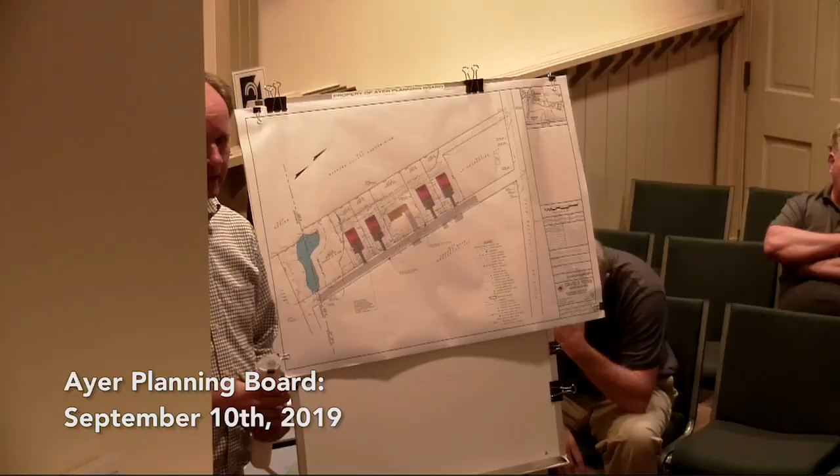So we made those adjustments, revised our drainage calculations, and in the 2 and 10-year storms, the amount of water going there was reduced even more, but the 100-year went up just a little bit. We're still sending less water to that design point from pre-construction by upwards of 20 to 25%.

So all the other driveways, the houses, all that stayed the same. The adjustments were basically what to do with the grass swale, which we removed. We piped it underground, and we've agreed to replace that existing catch basin and connect to the existing pipe that's already there. We met with them, they agreed to those things, and we got them the revised plans, and they were able to look at it before tonight, which was great.

Anything else in the letter, the original letter from the DPW? Did you talk about that bonding performance bond? We did talk a little bit about it, and our applicant is certainly agreeable.

Anytime you do work in a town way, that's automatic, that's understood. But on the private property side of things, it gets a little bit muddier legally. So I think setting up a bond when it comes time to apply for the road opening permit would be expected, and that's understood by the applicant.

That's usually when we get ready to have conditions of approval for a project, I usually consult with DPW and get the language set and the amount set. And that's why I was hoping Mr. Wetzel would be here this evening, because I don't have that information right now, and I'm not prepared to suggest a condition of approval related to the surety for this.

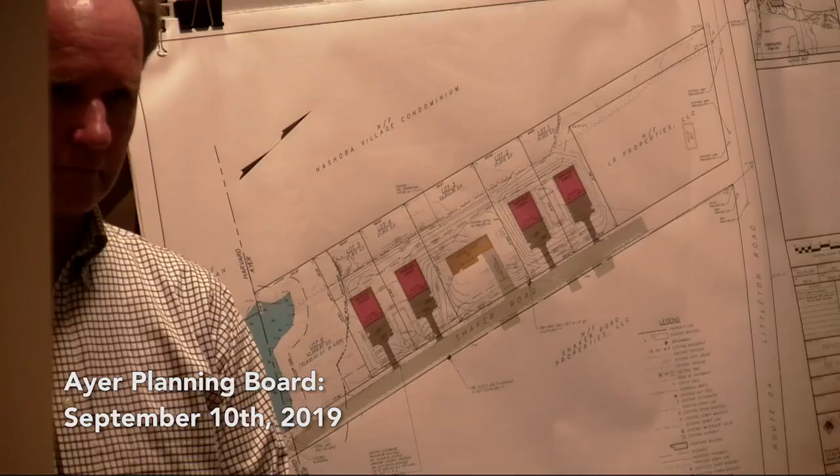The conditions that we would put on this would be the conditions they were allowed to put on because of the NPDES, for the town bylaw, stormwater related, or related to the guarantee of the performance of those drawings. So we're not approving a general site plan, we're approving a site plan for the stormwater drainage cycle.

Because they're A&R lots. I understand, yeah. But the other runoff on the site that's not being addressed by the new piping and whatnot, that's just going to be overground.

Well, we evaluated the whole site, pre-construction and post-construction. We had 3 different design points, not shown on that particular plan, it was shown with the drainage cover. There's one design point that goes up to Route 2A, up that little neck. Another one that goes to the catch basin, and a third one that ends up in the wetland, the low point down at the corner of the property.

Again, pre and post, we evaluated all those watersheds to make sure we were improving. Design point one was exactly the same because we're not doing anything other than putting the sewer line through there. Design point two was the biggest factor because all the impervious is going in that direction. The third design point was to the rear of the property because we're building up the land for the sewer line, so there's a berm back there blocking the water from going towards the roads, instead directing it towards the wetland. We have a level spreader right outside the 100-foot buffer zone behind lot number 5.

That's to kind of slow that pace down. And again, all the calculations were given to DPW to review, and they were happy with it.

So if the board agrees, we'll table this until Mr. Wetzel gets there. He's expected to come this evening, that's great. At some point we should be willing to make a motion to move this along. You've got a full agenda. Any comments from the audience? I'm not sure if anyone has any comments on that. No? Okay.

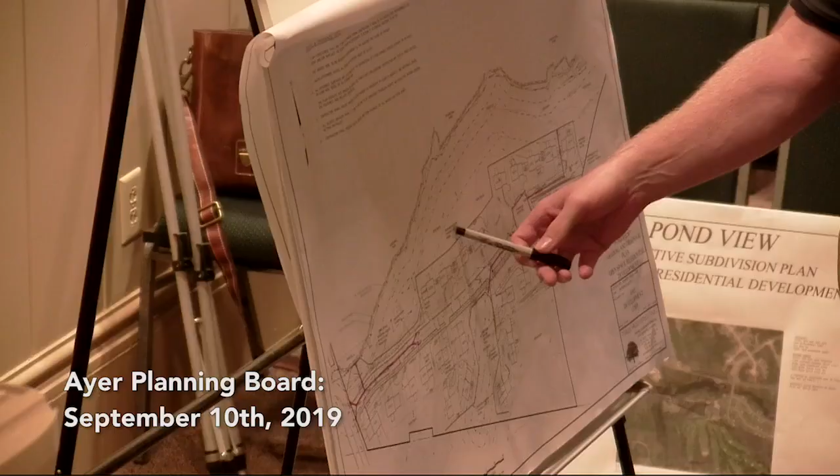I thought there would be an expectation that either that plan or one of the other plans would show the limit of work line, with either silt fence or straw - the proposed erosion control and limit of work. Do you have that shown there? Oh, it is there - it's that dark dash line that basically follows the back of all the lots.

I did not highlight it, maybe I have a highlighter. I don't. I'll make sure I highlight it on the next one for you.

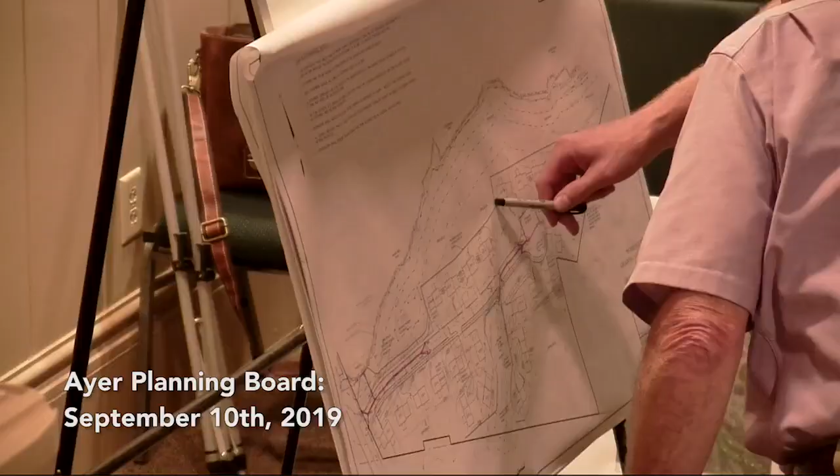This dark dash line right here follows the back of the lots, and that will either be hay bales or straw wattles, depending on what the Conservation Commission feels is appropriate, and that acts as the limit of work, limit of tree clearing, and basically where the open space starts.

Continue on, I guess. Now, is that the utility plan as well? No, that was the grading and drainage plan. Oh, excuse me - anybody on the board have any questions?

Just a question - do we get into the guarding at the outlet of those pipes? Is there any protection for people, kids getting into the pipe? There'll be riprap, so there won't be any erosion in terms of somebody getting into the pipe. I think they're 12-inch diameters, I don't think it's an issue. Good, interesting question, hasn't come up before. Not typically seen on an outlet pipe like that. Something that could be talked about. It's not going to be that big.

Can I ask a question? When we're going to do this, I should have explained to the audience as well - the applicant will make the presentation to the board, we'll then discuss it, and then we'll go to the audience. We'll take all the questions from the audience at the end of the discussion.

So this is the utility plan. I just colored this one up briefly to give you an idea. The green is the low-pressure sewer system, the E-Ones - we talked about that substantially last time. Basically, there's a small pump at each house that pumps the effluent into the force main system, and the combined effort of all those pumps pushes it through the force main to its eventual destination, which in this case would be up Shaker Road, closer to Route 2A.

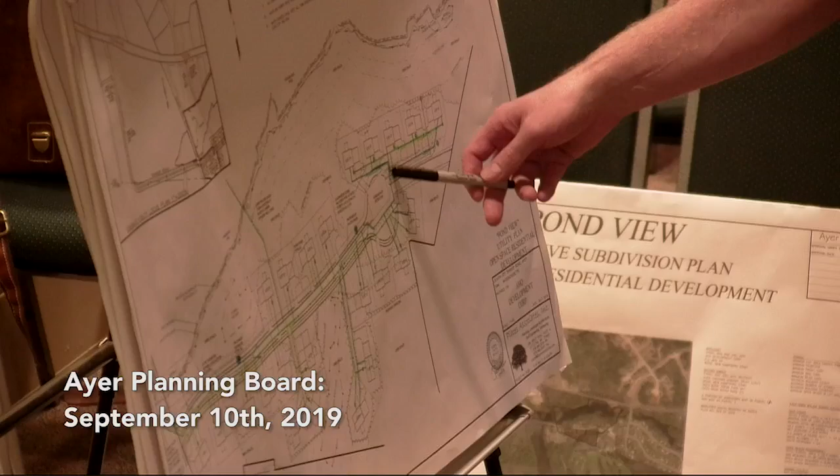So I've got the green shown here, just gives you an idea. The force main basically runs down the length of the road, and then we have services that go to each of the individual dwellings. Also shown on there is the water in blue, similar.

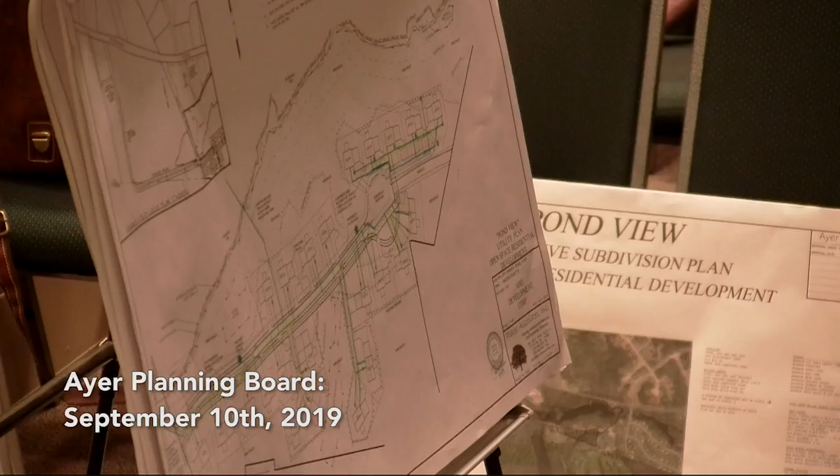We're going to be bringing the water from Shaker Road into the site. Again, up near 2A is where our pickup will be. It'll come onto the site, water main running down the main drag, and then we're looping that using the existing sleeve under Shaker Mill Pond - there was a 6-inch HDPE pipe installed under the pond a number of years ago. So we're going to use that to loop the water back and connect it over onto 2A.

So the way I understand this now is, we're talking about this as the proposed work, but the DPW will have input on all of this design work and thoughts as we go along in the process. We've met with them numerous times about how they want the sewer and water connected, and this is where we're ending up.

So you say you've got an existing pipe there. Is that pipe capped and clean, perfect the way it is, or how do you handle it? It'll be cleaned out, flushed out, sanitized, and pressure tested at the time. And that's only a 6-inch line, you said?

It's an 8-inch main that comes down onto the site. The 6-inch just provides a loop so that you don't get stagnant water. I understand that's what it's doing, but you've talked to them about that already?

It's been on all the plans. Excuse me, it's not on the plans, but we have talked about it. Now present in the room is Mark Wetzel, Superintendent of Public Works, DPW. We've talked about it, but there's some issues looking at the detailed design.

Number one is, you've still got a fair amount of houses after the dead end, so I don't know if there's a way that could be extended so we don't have houses after the dead end. We would like a hydraulic analysis to show that there is adequate fire protection at that location.

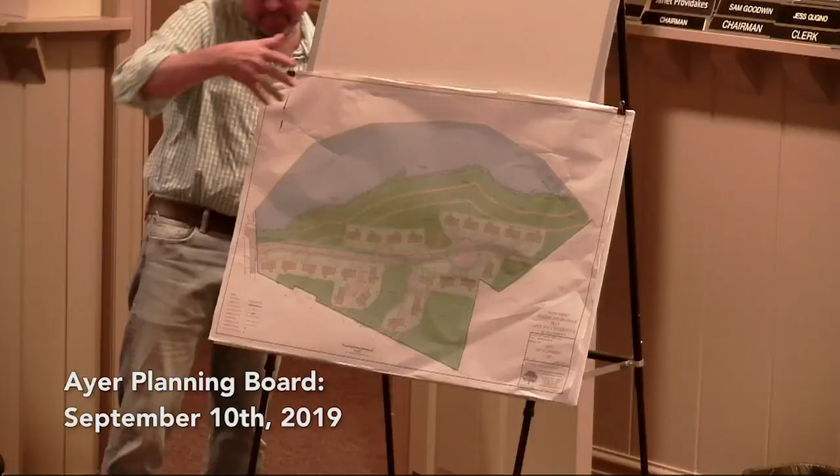Julie or Nathan, any other thoughts, comments, traffic study wise? I just agree with the necessity. My thoughts are that we need to at least look at from down Shaker Road, over the culvert, around the corner, off to the golf course. Get a count on what kind of vehicles are going down there and the safety of that intersection. I'm not sure we have to go all the way to Route 2A, because we brought this up before and determined that the number of cars being added to 2A is potentially not significant, but I would recommend that you pursue the question with DOT like you did before, Mass DOT, at least get their response.

My concern is not so much with that intersection, but with that sharp corner with the two stop signs now and going down that street. Currently, I did go down Shaker Road, and the pavement width on Shaker Road, I taped it, it's like 22 feet wide. That doesn't include the shoulders, because there aren't many shoulders. But our main concern is the intersection and the turn.

I have another question for John, related but not exactly the same. This is regarding the right-of-way shown on the two right-of-ways, which are connected and shown on the original plan. Your notes indicate that those right-of-ways are going to be removed, I think is the term you use. Do you have the authorization to remove those right-of-ways, or do we need to see something from the Shaker Hills folks, Mr. Curtis, that authorized you to do that, so we can understand that his understanding has changed?

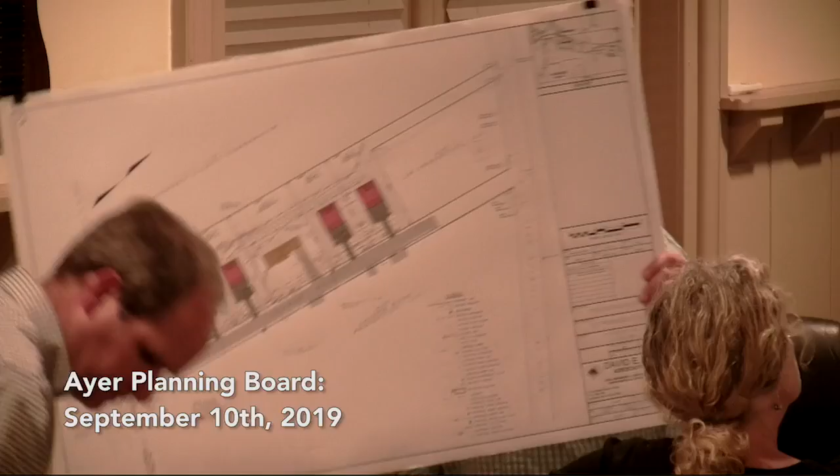You want to show us where that is on this one? For the audience, the outfall is down here. For the board, it's down in this area. So the pipe doesn't really show an exact point - it's right there where the arrow is, that invert. It's in the right of way, and the pipe exits out of here, daylights here. The road comes down like this, and there should be a drain pipe sticking out in that ditch there - there's a head wall, a stone head wall at it too.

I was just asking because our land abuts this very area here, and I wanted to ask Mark where that catch basin was, and whether it will impact what we have here. There's an existing catch basin up here. Based on having the infiltration system and the grading, the engineer's calculations say there will be less water when this is built than now.

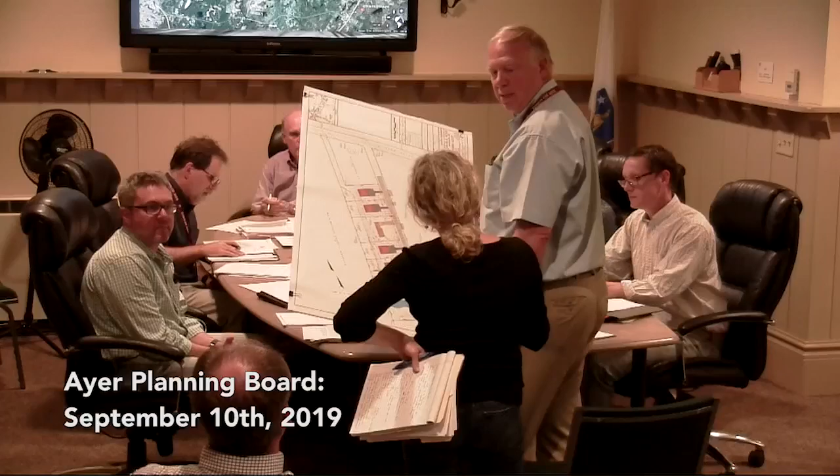And cleaner. That new catch basin that will be built - will it at all impact this ditch and go into our land? No, there's no work at all done in the town of Harvard related to this. It's all up here, it's just tying into that pipe, and that pipe just happens to go into, well, near your land. Water has a way of finding it. Okay, thank you for clarifying that.

Just if I may, Neil Gorman from Ross Associates again. I have been communicating with Harvard about this. Initially it was sent to DPW in Harvard, they deferred back to Conservation. So I've been dealing with Conservation Agent Liz Allard, who's been in communications with the chair, Don Ritchie. His most recent comments were in the email chain, and I can give you a copy of the emails here if you'd like - was that it looks better.

Still, they should have a DMH detail, which I pointed out to him is on sheet 5 clearly. And the inverts on the sump seem tight, which again, we're dealing with existing elevation, so when we do that evaluation, when we remove it, we'll make sure the inverts are the proper elevation. They didn't seem to have any objections, but then time ran out before getting here today, so I don't know what his last comment is, but the questions have been pretty basic. I did send them an email copy of the PDF of Mark's letter, so they're aware of the situation, but given that we're sending less water there and cleaner water, I don't know how much objection they have.

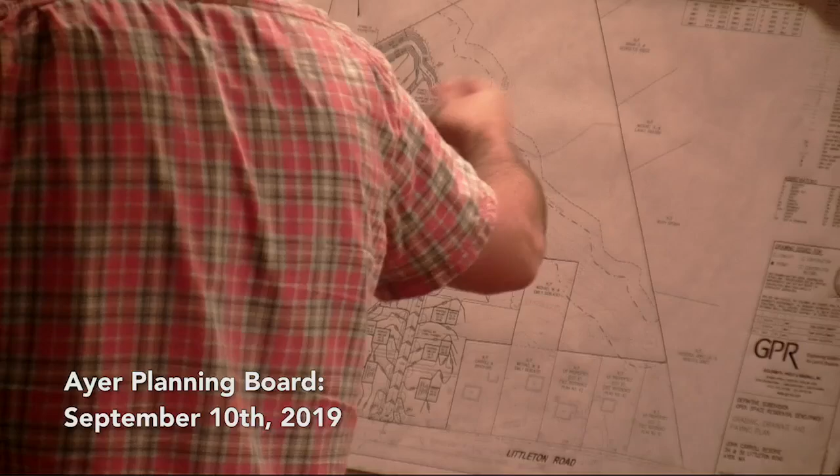We were able to make the calcs work by essentially taking this drainage swale and extending it slightly to capture more runoff as it came down the hill. We made some changes to the outlet control structure, but not the fill limits or clearing of the infiltration basin.

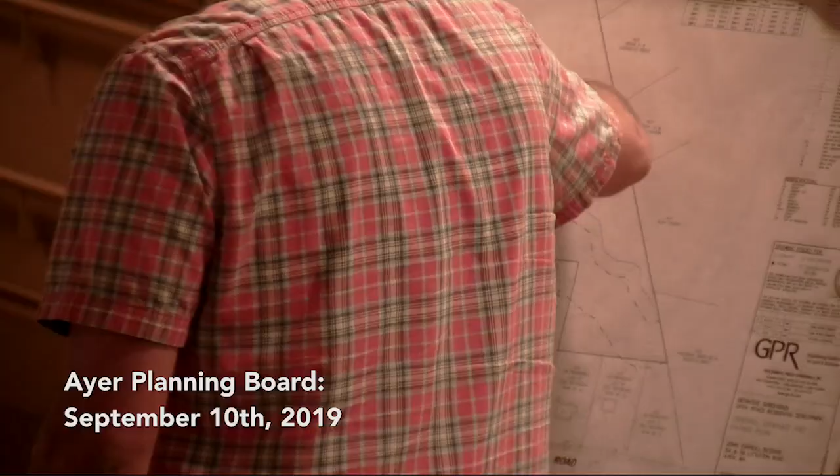There's been some changes to the property lines in this area, just with that attenuation area, trying to keep it on the open space parcel. This property line came square and kind of created a notch in this back corner, so we just squared that off. This lot slightly changed. The open space parcel's entire limits are now 54 and change percent of the total parcel.

I can certainly go over any specific points of the responses in the letter. The response letter, as we mentioned a month ago when we were upstairs in the sweltering heat, was as promised. We wanted to compile all the outstanding response comments into one documentation narrative form, feeling that we've addressed the majority of those. So this letter covers Mark's letter from August 7th and an email exchange from August 13th.

Sorry, I want to refer to the date on the change. So when you say this letter, the letter that we submitted was August 28th. Yeah, you got it. So that's the response letter, the project review response letter, titled for the John Carroll Reserve.

It touches upon, in order, from the Office of the Town Planner, the site plan application comments dated August 7th. There was an email exchange from the fire chief and the town planner regarding the new sweep analysis for Ayer Ladder 1, dated August 13th. There were two BSC peer review group letters, one dealing with stormwater management, the other with the notice of intent, and lastly an updated Public Works comment where they reiterated and commented on one of the comments from the BSC group letter, as well as reiterated some of their previous comments.

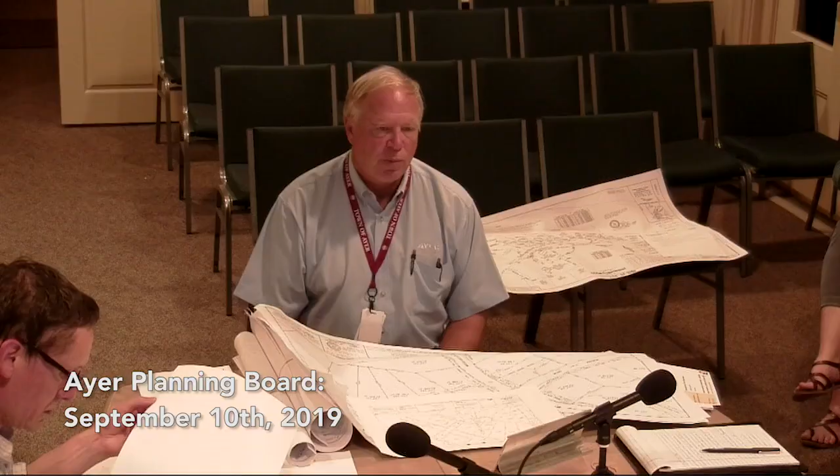So it's Hickory from Old Farm up to Hemlock, and then Hemlock from Littleton Road up to Hickory. The reason I mention this one may not be—the biggest issue on the punch list is I noticed they used the wrong catch basin frames. So the curbs are starting to sag, and he's got to go back in and cut those out and replace them. That's why I'm thinking that's a fairly big job. If he doesn't get to that, then we'll just scrap this phase.

Now, when you say he used the wrong frames, we're talking about the circular collar that sits on top of the catch basin, held up by a frame, right?

There's two different ways we install those. One is we put a piece of granite with a curb inlet behind it, and that's what we call a 3-flange, because there's no flange on the bottom—the water curls over the back. Or you put a 4-flange in, and then you can pave on top of that flange and set the bituminous in that.

What he did was use a 3-flange frame with a bituminous curb behind it, and now the curb is settling and starting to sink. I get it now. So he's going to have to cut that frame out and either put a granite in or redo the curb.

That's why I haven't gotten a response from him—we told the contractor a while ago that had to get fixed, but nothing's been done. So that's why I'm thinking this one is probably more likely to get yanked before town meeting. Everything else is fine—it's the usual stuff of cleaning up the drainage basins, cleaning all the catch basins. They didn't have hoods on anything in there, so he's got to go put those in.

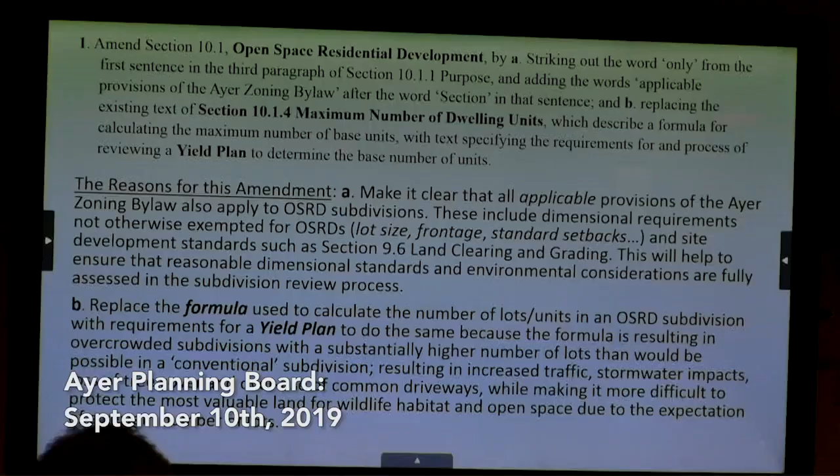But anyway, I'm not gonna dwell on that one, it's pretty self-explanatory. The second part is more significant, we're gonna replace the formula that we use with a yield plan requirement, which is the old-fashioned way of doing OSRD plans. The planning world came up with this idea of making everything predictable and formulaic with a formula.

And it works well in towns with large lot sizes, like most of Massachusetts has with 1 or 2 acre zoning where you don't have water and sewer. So the math will work out there, but where you have such small lot sizes as Ayer, 12,000 square feet, when you do the math, you get lots of units. So this is just an illustration of what a yield plan could look like.

Basically, a yield plan is a sketch, at a preliminary plan level, without all the detailed engineering, that shows you have the amount of frontage you need along a road, the lot area you need, and you basically adhere to the wetland and other requirements. So you count all those up, assuming they meet the zoning, and come up with a number.

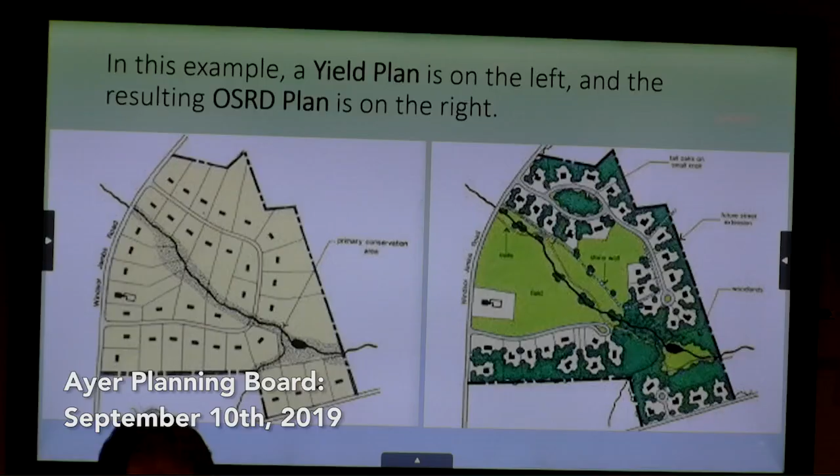The planning board will make a finding when we have a preliminary plan before us, based on the yield plan, that this plan can get 30 lots based on a conventional subdivision. Then you apply the 30 lots to the OSRD plan, where you have 50% open space, and you have to do all these other things, where you manipulate the lot size and frontage requirements, et cetera. But first the yield plan to get the number, then the negotiations for the 50% open space.

Right. So this, I think, will get us - and here's some real-world examples, you may remember these from earlier in the evening, but I won't name names. So you have a 10-acre tract of land and about 2.5 acres of wetlands. When I did a sketch - now this is not definitive - I came up with approximately 14 lots with a conventional subdivision, 100 feet of frontage, 12,000 square feet.

But when you did the formula that's in the bylaw, you come up with 26, which is an 86% increase over the conventional. The actual plan that they showed us has 19 lots, which is a more modest 36% increase. So we've seen in the 2 cases so far that there's no way they can realize what the formula says without having tiny lots and cramming everything together, which is very difficult.

Part of the problem was that the 2 proposals we've seen came in a district with a minimum lot size of 12,000 square feet. So the way the formula was set up, you're dividing by 12,000 and getting a higher count. But if you moved to A1 where the minimum lot size is 40,000 square feet, you don't have that problem. But we did have the problem come up where we had a smaller lot size requirement.

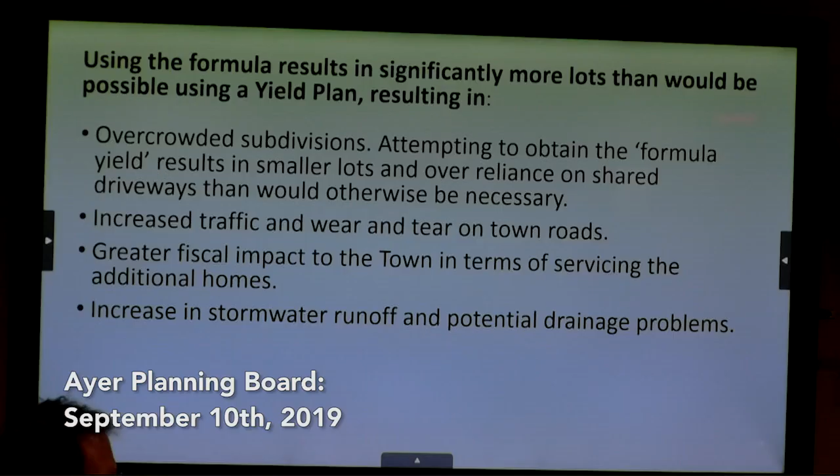This one is very important too because it constrains us in laying out and preserving the 50% open space. You have so much room to put all these lots, and then what's left over is what we get. I think if we can decrease the density a little bit to be more in line with a conventional plan, we'll have a lot more flexibility in laying out the subdivision, both the road, the lots, and the open space.

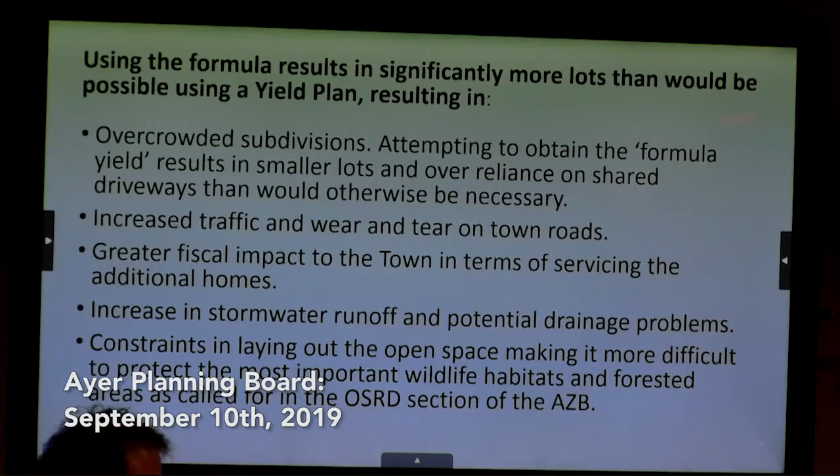So is the issue here, Mark, that there's like a bait and switch? The developer thought they could get a lot more because they read the formula, and then when they got into the details, it wasn't the value they thought? No, the opposite. They exploited the opportunity to get many more lots within the same space. Okay, so the formula gave them a big number, and they tried to get 2x.

Yeah, the formula basically allowed them to take the parcel and divide it by the smaller number with no regard to frontage and lot size. Because we limit frontage, this is really helpful if you start from the frontage requirement, so you can't have a lot on the street that doesn't have 100-foot frontage in a standard subdivision, and a lot size of whatever the minimum is, depending on part of town. But since there was no frontage requirement in the new deal, and you divided it by that number, you could get a higher count out of it. That's one of the problems.

There's several problems. But another problem is that without making this change, we have no wiggle room to negotiate any affordable housing. Isn't that part of the deal too? Yes, because the OSRD section does talk about what's called the density bonus, or bonus units. If you provide extra open space or some affordable housing, you're supposed to be able to get a unit or two extra. Well, there's physically no room to do that now. No, but if we go back to the yield plan approach, there will be. So we'll have the ability to have incentives and generate affordable housing, more open space, etc.

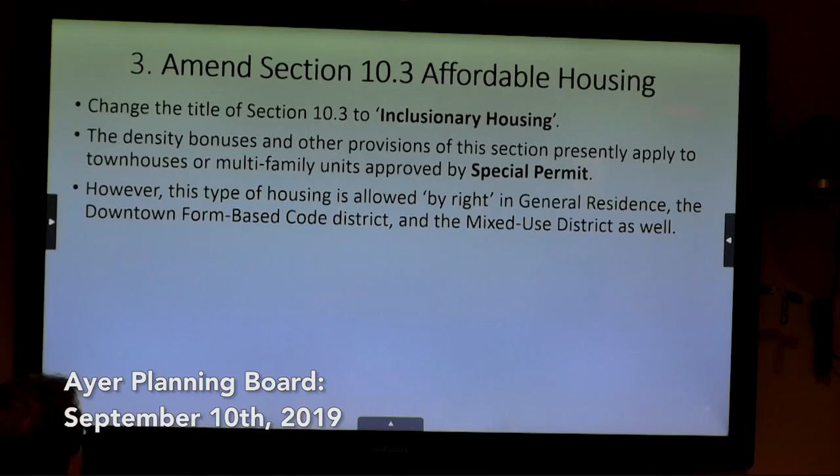So that's it, we're not changing the formula, we're really not changing much at all. We moved a few things around - we moved the section in blue on the bottom of page 5 from the back. That gives you the formula for the density bonus.

And on page 7 of the actual text from the town counsel, or my memo that has them all, where you see 'procedures' on page 7, in the blue highlight - a minor change I'd like to make here is it says no building permit should be issued for a development subject to section 10.3 unless the planning board has granted site plan or OSRD approval.

I would like to change that to say 'has granted applicable approval,' so that we're not tying it to a certain type of development. I believe town counsel flagged that you can't require a special permit for a subdivision, so where we mentioned OSRD, even though they're allowed by right in our town, we didn't want there to be any confusion. So it would be applicable development.

Or applicable - is the counsel comfortable with your word change to applicable? They don't know about it yet, but they will. Okay, that's fine, keep going. The final version has to be approved by counsel - just want to make sure that in itself doesn't create new ambiguities. I don't think so, no, it would be whatever is applicable, so I think it's fine, but you're right, that word change needs to be reviewed.

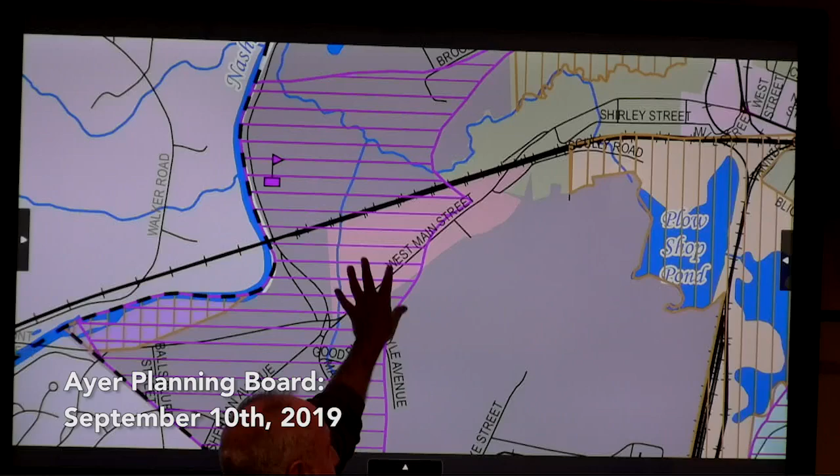Okay, so just understanding what we're talking about here, this is what we call sort of the outer reach of the West Main Street corridor, historically known as Mitchellville. Believe it or not, Mitchellville is a place. Here you see the pink is the current general business zone out there. So unlike when we did the form-based code downtown, where we literally replaced the entire downtown district, we just removed that and inserted the new. Here, this is not the only general business zone in the town. So we're saying we are, in this case, removing this general business zone and replacing it with the proposed Mitchellville, West Main form-based code. That's the first thing to understand, that's what we're doing.

Now, just to interrupt for a second, do you feel it's very critical that we use the term Mitchellville to identify this location? It isn't necessary, and I've gone back and forth. Some people find it distracting, saying what is that? The only reason I did that is because as we go forward with this, we do form-based codes to create place, the economics of place. That's the whole reason. It's not a strip corridor, it's a place. This was a historic, real place. And the only other thing is when I say to people we're doing a form-based code for West Main Street, they'll often say, oh you mean starting right at Park Street? And I say, oh no, it's further out. So for all those reasons, but if Mitchellville starts freaking people out too much, we'll just say it's the outer West Main Street form-based code. No, stick with it, we got it, there you go.

All right, and just understand, as you guys know and the other folks know, we go from the so-called conventional zoning map to a regulating plan. Of all the form-based codes I've done in my career in many places, this must be the simplest regulating plan I've ever done in my life. I must say, this code is really stripped down, simple. You only have 2 transects, that's it, because that's all you're really dealing with here. And again, this zone goes right from sort of the railroad overpass, past the bridge, right to sort of the Verbeck Gate. So we're talking here.

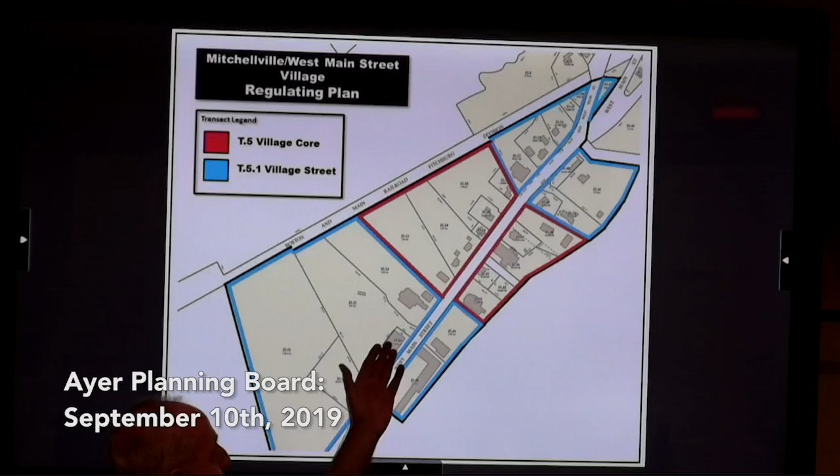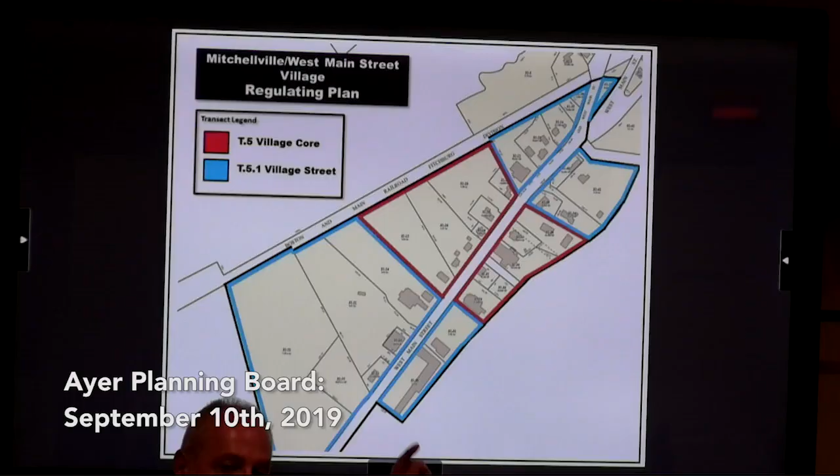And then we have a T5.1 on the outers. We did a T5.1 in the downtown too, because it's really not a T4, it got low. And again, it shows that when we do these codes, they are designed specifically only for this place. It's not abstract. It's literally designed only for this place.

So here's where we have the regulating plan, very straightforward and simple. I did this just for folks in general, just the whole transect bit. What is it? Town center, think of the traditional New England Village Center, the white wooden church, the houses close, and then as you go in the outer rings, as you move out, less and less intense.

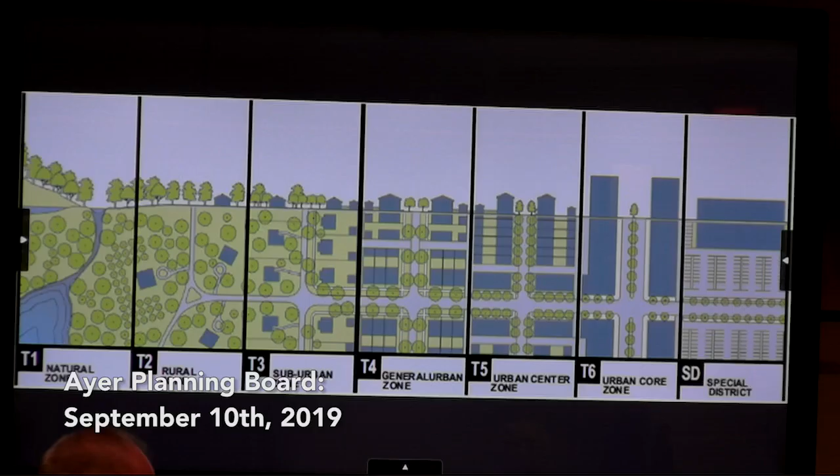We're trying to do this in there, which reinforces the open space recreation plan, showing we need to channel the most intense development in the downtown central cores, and then as we go out, a little less and less. In most New England towns, understand, a lot of New England towns have little sub-villages in them, which makes New England towns so cool.

This is sort of an example, because our T6 is right at Park and Main, and then T5 is a little out. So you say, well, then why do we have another T5 way out there? Shouldn't that be—because that is Mitchellville, it's its own little village.

So I call them sort of like little bonfires of place. I'm gonna bring them up. Bonfires of place, these little spots, oh yeah, there's a little—okay, anyway, that's it.

And the transect again, most intense development—we know, just what we witnessed here tonight, there's amazing development pressure on our neighborhoods now. Why are you packing this stuff in my neighborhood? We want to channel that development. Developers don't care where they develop, they just want to develop where it's quickest, easiest, where they can make money. We're saying we want you to channel that stuff, lay off the pressure on our neighborhoods, come to the downtown or to these new villages, which are designed for it.

And again, there's a lovely corridor. There's the railroad bridge right there, overpass. Here is our subject area. You see how lovely it even looks just from that. It's obvious this place is suffering.

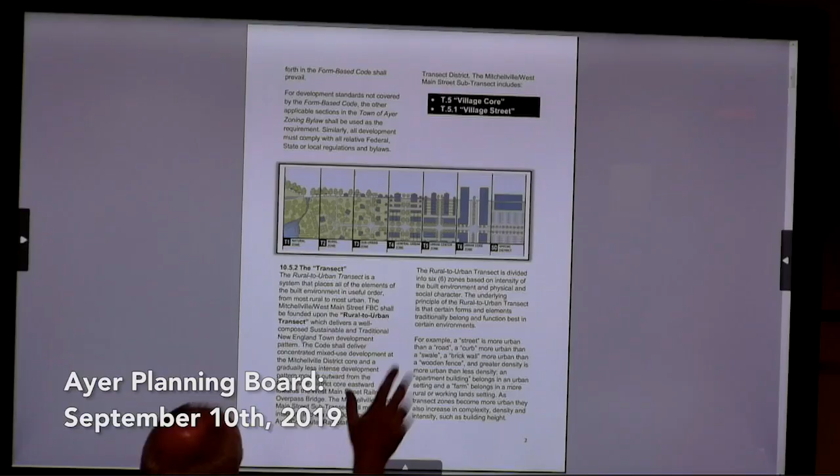Again, so folks can come in, see the transect, how that all works with the code. There's a regulating plan describing all that. Same right form - and that's the cool thing, guys, once you do one form, you get this sort of template down, this thing actually rolls really fast.

Getting into the frontage types, I won't get too deep into that, but we know what we do with this new building is built. There's just a certain menu of frontage types that relate to the street, and those frontage types have the district purpose, just to facilitate construction of new high density.

I said that, and I might remove that word. It's really not high density, it's just a little bit more escalated density. That's multifamily on this business, generate maximum amount of municipal real estate revenue. We gotta put that land to work.

We only have nine square miles of land in our entire town. Every parcel is precious to us to maximize for the taxpayers of this town so they can afford to live here in the future.

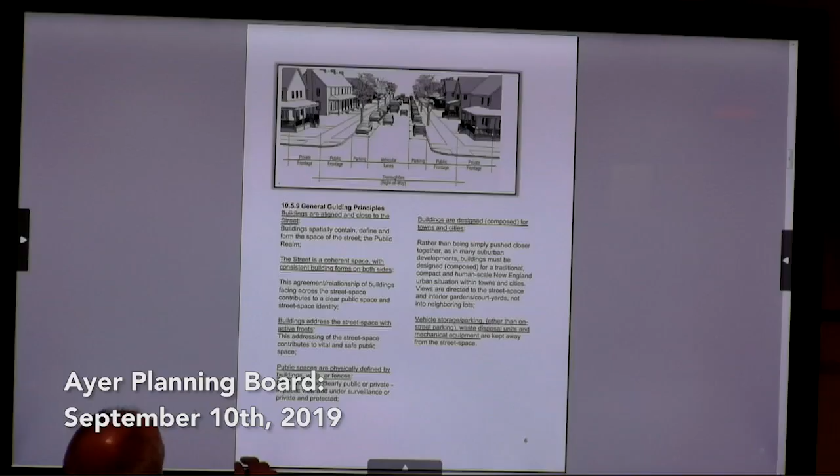Do you have a minimum story height for the transect? We show T5. This is by the same rules as before, same as the other. So you get right in that group, you say, I know this, we're familiar with it, we get it.

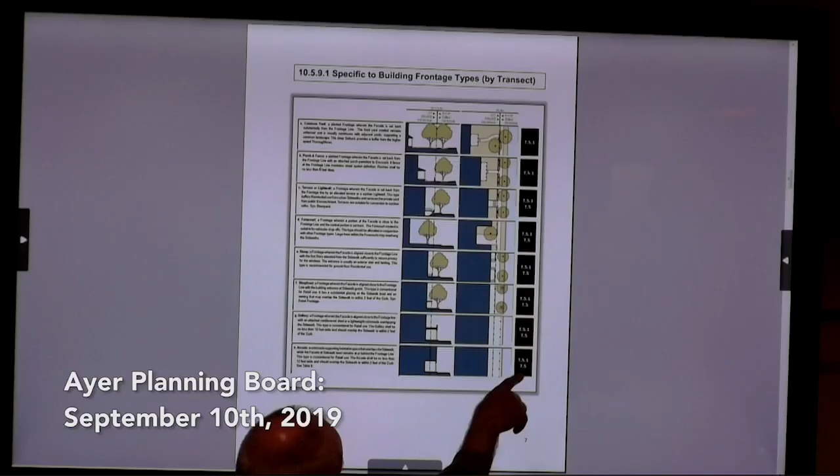Frontage types, what's okay for the T5 and T5.1, there's a good mixture there. We show those frontage types. This was all in the last code.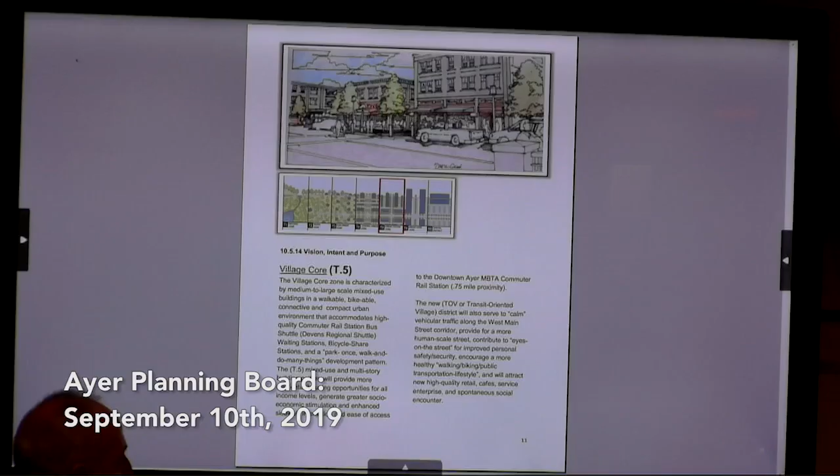T5, same thing, you get into the descriptives of what it is. We're just saying this is the more intense part, that's the sort of the core, we'll have a lot of that. I won't go into key features, but make sure your primary entry door actually addresses the street.

A little stuff about facade walls, and by the way, this whole code was very much charged by Ken's comment when I did the first presentation. It was still way too intense. I've gone through this whole thing and basically lowered the intensity of everything.

Meaning, if you remember in the downtown Park Street code, we actually had a street wall for the part of the building that doesn't occupy the rest of the lot, to make sure the buildings had a little street wall for the portion where the building is in front. Here, you don't want street walls out here, that's downtown. So all these little things we calibrate and lessen it.

But this is where we get to the meat of it. T5, right off the bat we changed this, we're saying now a 5-foot minimum front setback or a 20-foot maximum. Right now what's out there in the general business, you have a minimum 30-foot setback. This is why all the buildings are pushed back, it looks horrible. There are either cars parked in, or they just leave the front empty because they don't know what to do with it, and it ends up looking terrible. This is what's causing this.

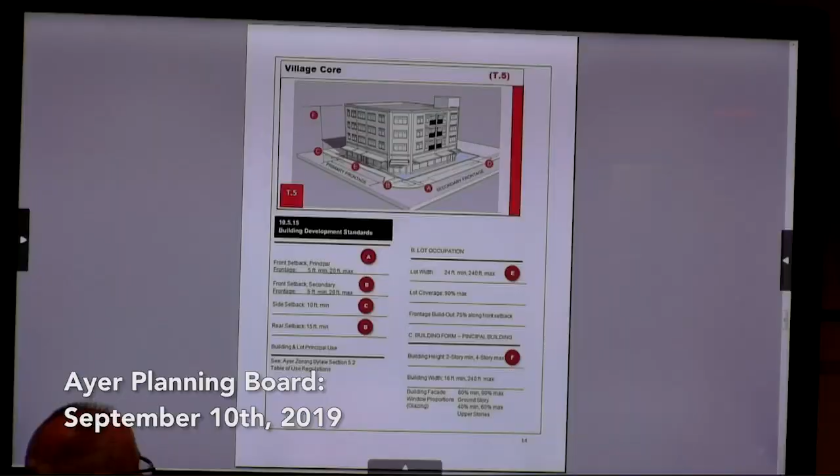Again, we will disregard the building width stuff, we've got to recalculate all that. The building facade, the window proportionality again, which is the good standard, 60 minimum, 90, and that's again your windows on your ground level. You want to see good window transparency, which creates street vitality and life. You don't want to have these dead walls. Again, these are the same percentages we've used and they work very well. We will correct that lot width and the coverage and recalculate those.

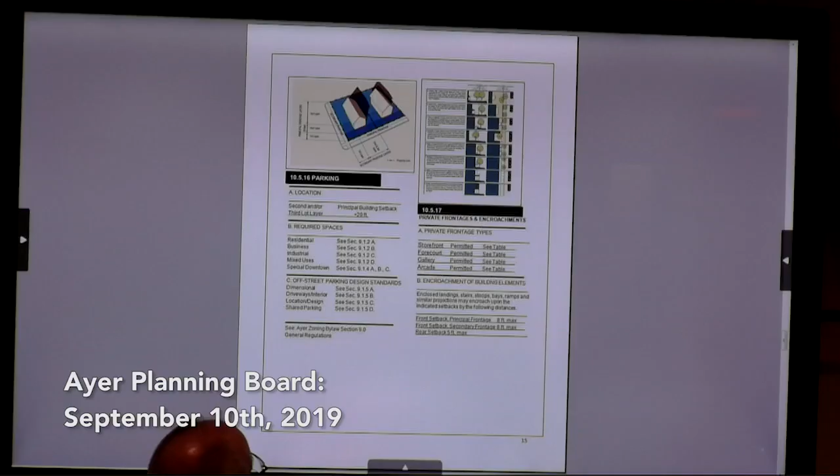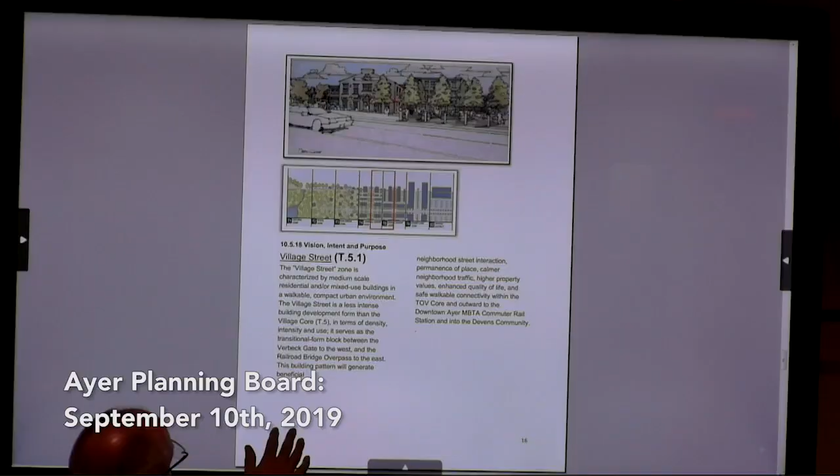Okay, last page again is the same as the last code, just showing the parking location. And again, we're just doing it in the layers. We want to see it again in the second or third layer, so the cars aren't right up on the front plane of the building. And the last part is frontages, again just laid out very straight. The T5-1 is a little less intense with everything. I'll just shoot through that. Let's just get to the table.

We still are at a frontage, 5-foot minimum, 20-foot max, so the frontages and setbacks are the same, side and rear setbacks, all the same. We did drop down the maximum lot width here, because if you're gonna see larger buildings in terms of their scale, you want that in T5. The ones at T51 should be a little bit less in scale, so we dropped the maximum lot width to 160. On T5, it was 240.

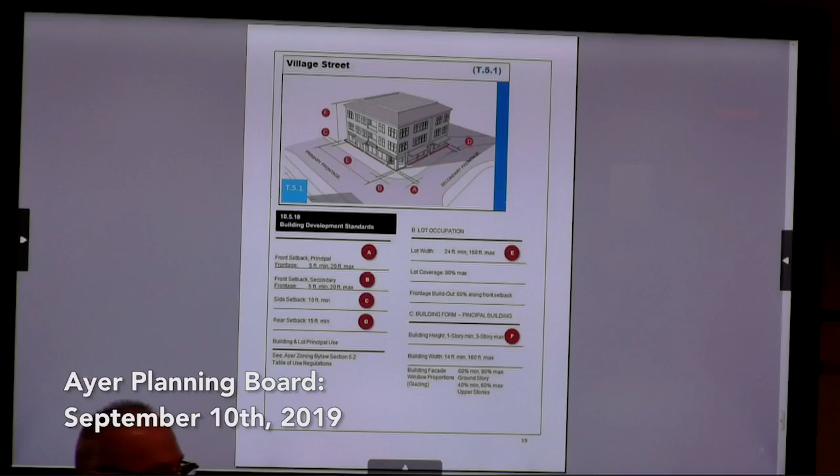Again, we'll recalculate the minimums, the lot coverage. Frontage build-out here on T5, we're saying 75%. We want that building occupying 75% of the frontage to create that street wall. Here in T51, we're saying 60%, again a little less intense, as it's a development pattern.

Building height here, we're saying it's actually the same as what it is now with GR: maximum of 3, minimum of 1. So we just leave that where it is. And again, we'll recalculate the building width, the building window proportionality, same, 60-90 on the ground level, 40-60 above.

You gotta add the R to principal again. Yes, make sure that typo is correct. I guess, Alan, I'm thinking in the 10.5, in that core.

It's still not making sense to me to have 20-foot, requiring 20-foot spaces. Even the picture you're using here, it's not a 20-foot space between those buildings. I think the density, you might want to... What do you feel would be more the way it should be?

Are you saying there should be more separation? No, you should get closer. Oh, really? You think so? You're gonna have a problem because you gotta get a driveway behind these things, for roads and parking. The fire department doesn't wanna have to get a fire truck back there.